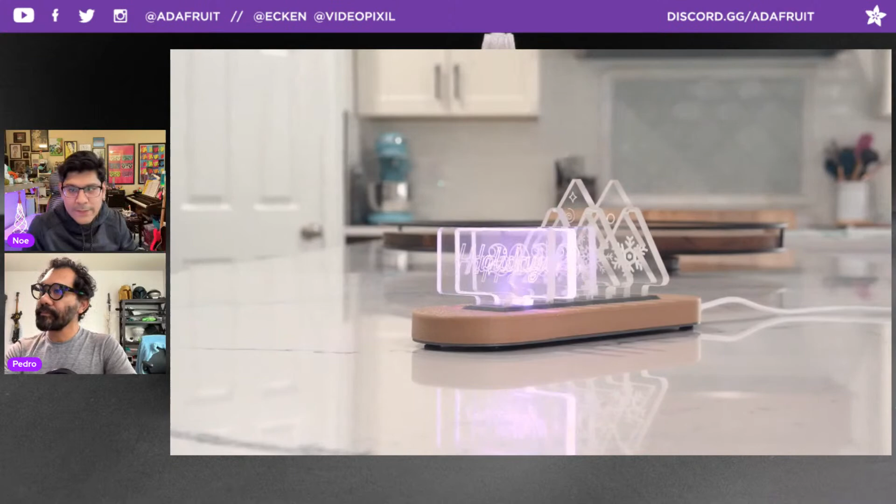So I've seen a couple of folks actually make this project with their own laser cutters and their own bandsaw cut, yeah their own design. So it's just a cool effect to create a cool stand for pieces of acrylic that you can edge cut.

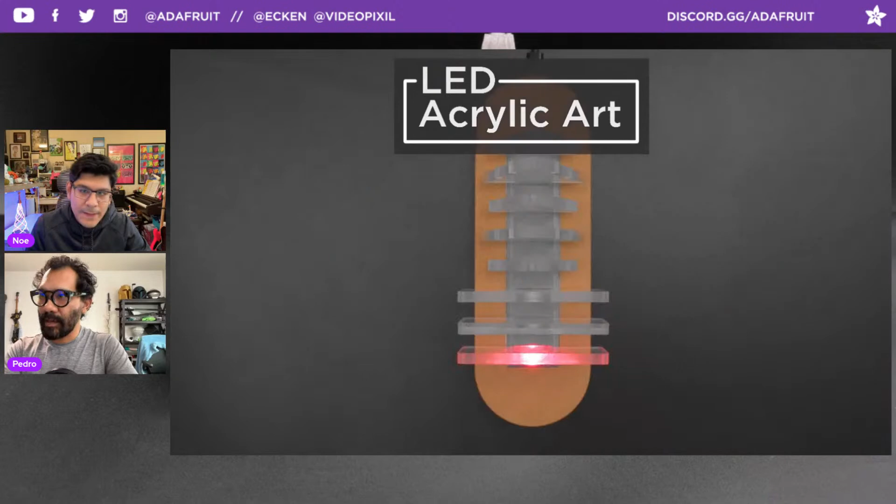Edge light. Python code to do each individual little light up. Yeah, oh this one's cool.

And you can see through them, actually, which is kind of cool. And it's code by Phil B.

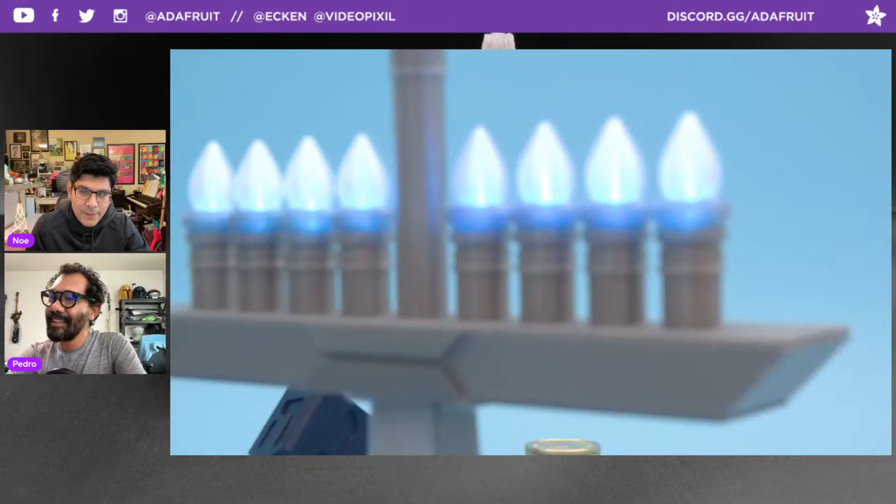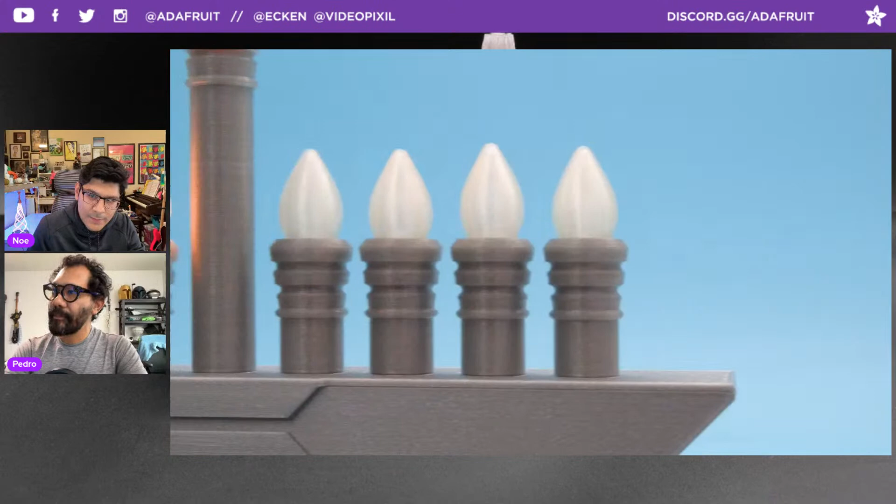Hanukkah, this is a menorah. It's got the 8, yes. Or 8, no, 9, no, 8 candles, and the middle one lights the candles. Press the button and it lights up the candle. So it uses NeoPixel buttons and this nice 3D printed menorah.

I think it's a QT Py. This one's been on Lamar's list for quite a while because she said a lot of the ones that are out there don't actually do this functionality, right. Right, they all just light up and they don't actually work like a real menorah is supposed to be lit on each night of Hanukkah.

Yeah, the correct order being that the first one is already lit. I'm guessing the other ones didn't do that. Right, yeah, the order goes from right to left, and then the middle one is what's used to light all the other ones. So functionally it's got some logic in there.

Yeah, it's all done in CircuitPython. It's a Liz Clark collab.

Yeah, it's pretty cool. Yeah, you can do so much stuff with the Crickit. You can have sound effects as well if you want to. Yeah, there's sound effects on here, so when it drops down it does a nice little laugh.

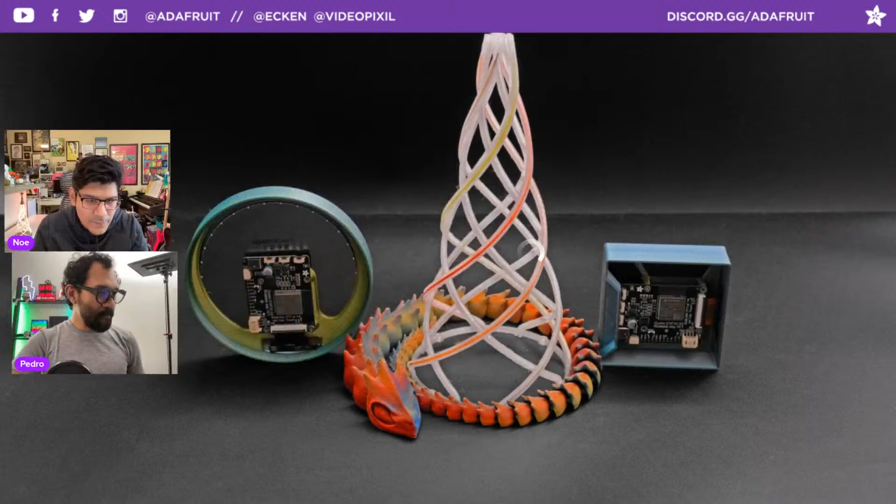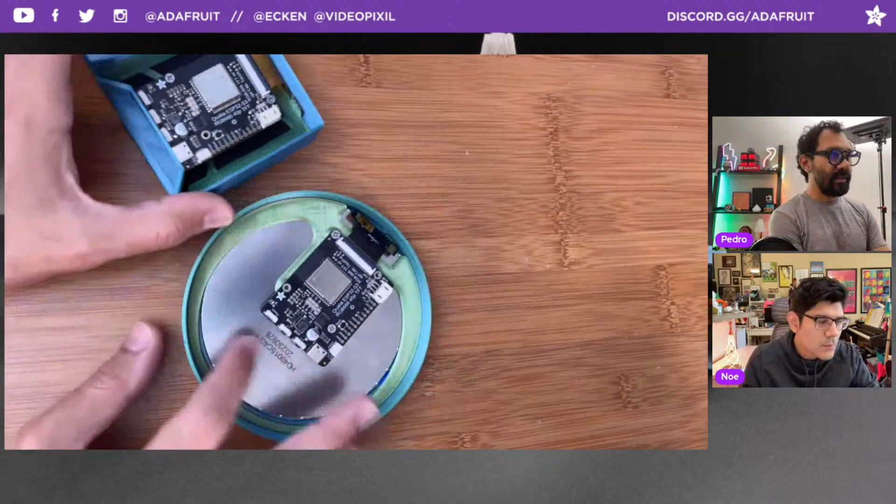All right, continuing on with what we're prototyping. We got the next prototype as well. We got a bunch of these screens in. Now the work begins with getting all the coding in and all of the cases to fit.

Right now I'm working on this 4-inch round display. Take a look at it, it's not really round, it's more like an ellipse or an oval. The screen where you actually see the content is a circle, but the plate that the display is on is not, so it's a little bit challenging.

You can see here the mount for the Qualia board, which we're using for all the displays now, powered by the Qualia. This one has the S3 on it, and you can see the mount for it. It's a little weird, you get these weird shapes. I'll show it in the sketch when we talk about the project when it's released.

And then there's the shape where the ribbon cable connects to the PCB. It's a good channel there, so we have a channel for that, and then there's just the weirdness in the way it's sort of like a squished ball from the sides.

Still trying to get that tightened up so it's not so tight that you're accidentally breaking your display by inserting it. So it's a little loose right now, just a tiny bit, as I close up the tolerances for that.

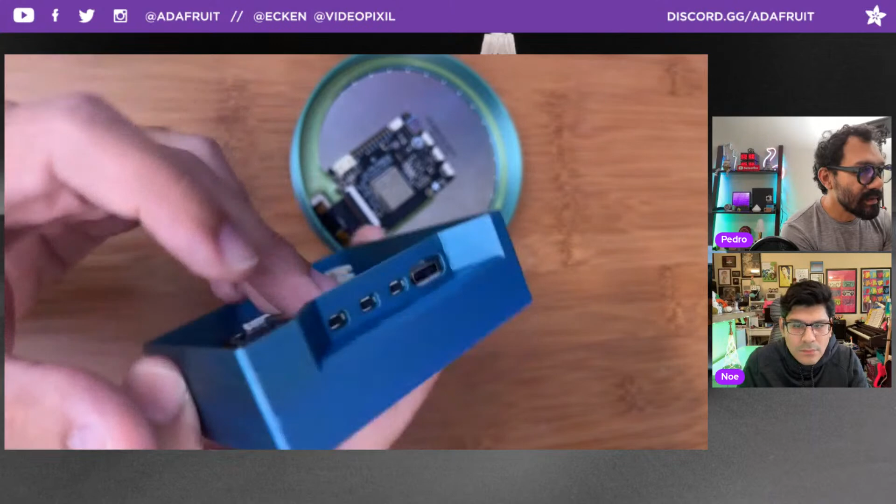I think I'm going to do the Ninja Flex buttons for this, so I don't have to keep messing with trying to make this thinner or having chamfers, because with how close they are to each other, it's just going to eliminate or not work at all. So I think I'll go with a strip of Ninja Flex, so each button can be pushed in that way. Maybe an overlay that goes over it, or inserted somehow. I'll figure it out, might have to push this back up or something.

For this guy, the way I'm going to cut in, I'm not too sure.

This would give you access to buttons, right? The A0 and 1, or is that for sensors? I think you could do a button, a button or two, so I'll probably wire that and it'll come out of the back or something. But I will try to go in there and do the same thing where I'm cutting in like that, so they can have access to it. I shall see. Yeah, it's okay if you don't.

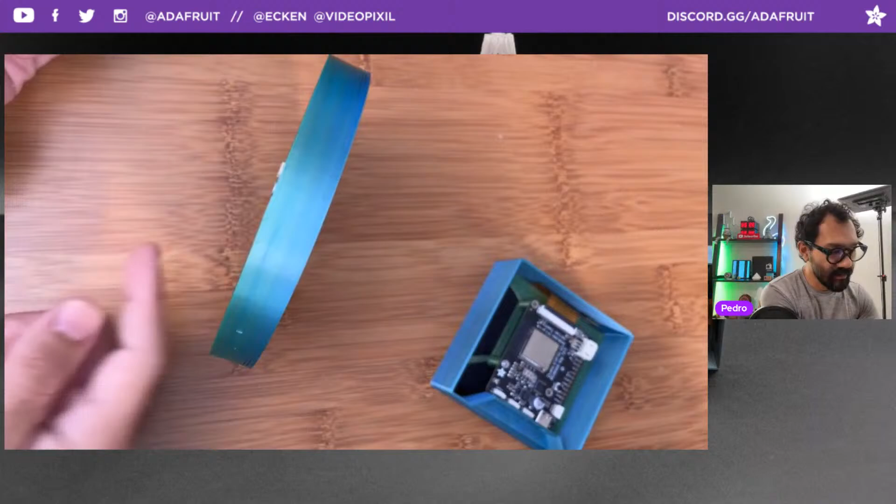I'm trying to think about the use case of what this is going to be for. So if you don't even need a button, but if you do need it, you do need USB - that's something I thought about. So having maybe the right angle adapters we have, so it's pointing up, you plug it in like an Apple mouse. Which actually would work, since I'm thinking it'll be on its side like that, so it'll point outwards with the cable. That should work.

So yeah, the only thing left is getting the lid designs on there and getting the code to work. There was a bug with Chrome in terms of flashing the bootloader on there, but that should get worked out soon. So that's what I'm working on now, just getting the lids and any other mounting geometries figured out.

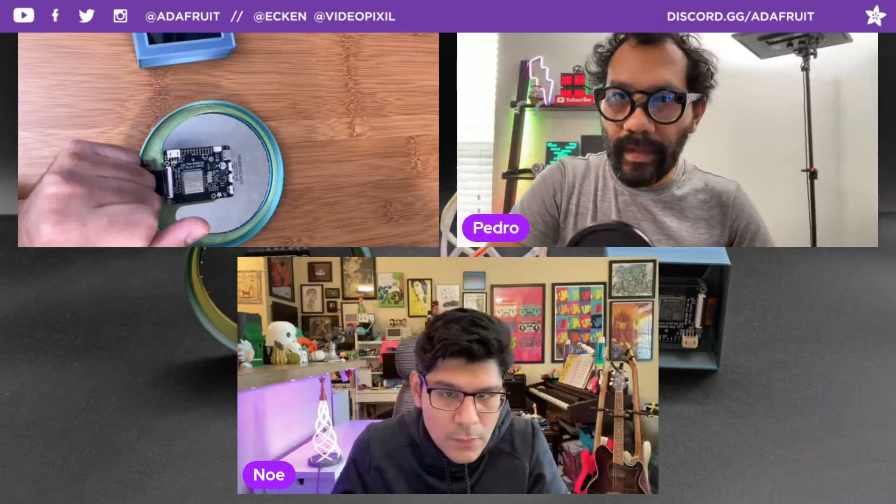I have a quick project, since our coupon code is Noodles. We have these small, shorter noodles, and I wanted to come up with a 3D printed ornament using them. So I came up with this thing - it's a little bell shape, and it has a custom case for holding a CR2032 coin cell battery, which is just enough voltage to power one of these little guys. And then I have a little slide switch so I can turn it on and off.

It's blinking, nice, there it is. I have to press these together. I have little bits of solid core wire that wrap around the inside of the case because there's a little channel for it. So that's kind of a neat way to create a really slim, low profile coin cell holder, because we have coin cell holders with built-in switches, but they're one color, fairly big, and not the right shape, I think, for a little elegant ornament like this.

So I posted on socials, and folks are submitting different ornament shape ideas. I think the winner is, of course, the Adafruit star - I'll have to use a bigger noodle, the longer one - and then of course the pickle, the Christmas pickle, so I'll have that in green. But I thought it was a cool idea to create a custom coin cell holder that complements the design of the ornament. So again, this is a bell shape if you haven't figured it out, and it has a little loop, but it's got that same method of creating a shape and then a channel for the LED noodle to press fit into.

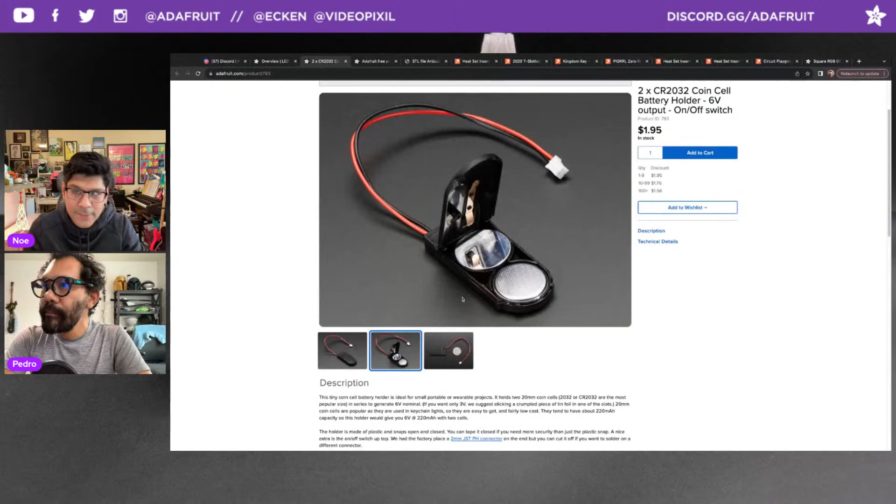So the LED noodle snowflake uses the two CR2032 coin cell holder. This is good for powering up to 4, because it's 6 volts, so you can definitely double up.

What did I use on mine? They're pretty bulky, I think, and like they come in... I guess you could spray paint it or something, but it looks like we have another one here. I used this translucent one too. Oh no, this is just one though.

Oh right, I actually have not seen this one before. Have you seen this one before, Pedro? Yeah, I got it, I grabbed like all of them. Really? The Ultra Hand.

I could probably recreate this design so it can be clear and just reuse the guts, the little spring contacts. That's kind of what I created - I made my own spring contact with, I think, solid core wire. The easier route is just to make a cover case like I did.

Here's a clear one that's nice - that's the one I used. But it's just only a single one. Yeah, I guess that's kind of nice. Well anyway, you can 3D print one and use solid core, so all sorts of options.

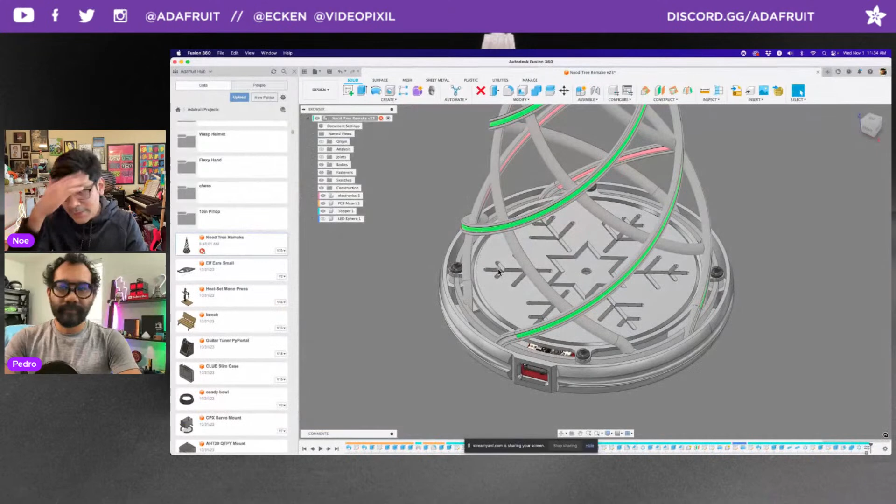I'll just show kind of like the finished version of it. So let me share my entire screen, go into tunnel view. Fusion 360 got an update, I think yesterday, where they have this new feature called fasteners - an integrated way to apply fasteners to your mechanical designs. One caveat though: you can only access the feature through designs created with the Teams hub, which is the new kind of data storage for your Fusion 360 models.

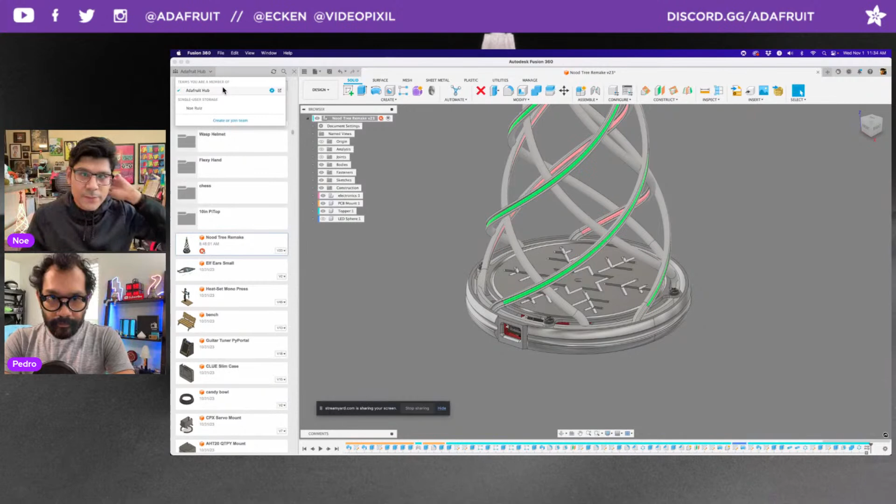They have a single user storage, and then they have a Teams hub, which allows you to share and collaborate on your design. That's just one thing I had to reach out to the support team for, because I wasn't able to get that feature. But it's super easy to create a team hub - you just click one migrate button and it transfers all your files over to a team hub, and then you have a lot easier sharing abilities with it.

So under the insert menu, they have this thing called insert fastener - this is what the UI looks like for it. It's basically a better way to create screws than having to use the McMaster plugin that's built into Fusion, which is what I use a lot of the time. But it's very involved - once you get your screw, you have to use the pattern tool to make multiple copies, and then you would use a joint to apply them to every individual hole.

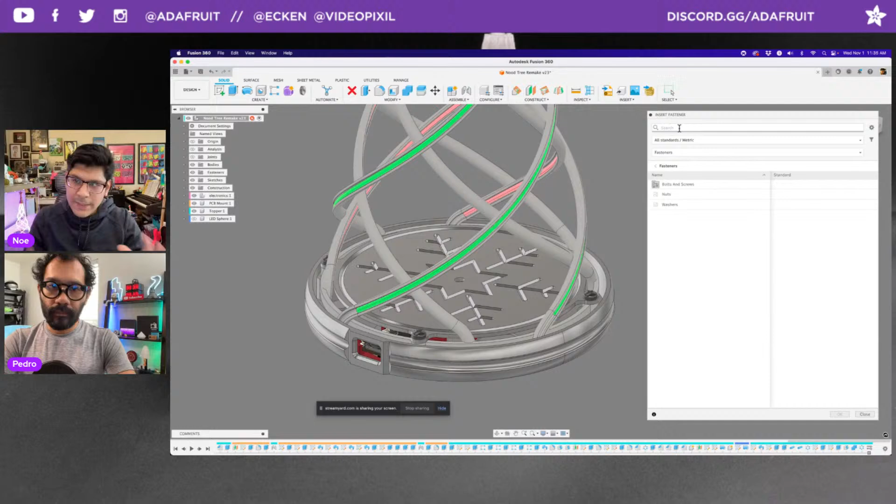This is a smart fastener feature where you add one screw and it looks at the body, and it'll add the rest. Let me see if I can do a quick demo. I'm going to add 4 screws to this PCB here. This is the LED driver that we're using in the tree.

I'll type in insert fastener. It has a built-in search, so I can say I want M2.5 screws. It will filter out all of the screws. So it's not just screws, it's washers, hex nuts, that sort of thing. And here are all the available screws. They have Phillips, countersunk, flathead, roundhead, hex bolts, all those fun things.

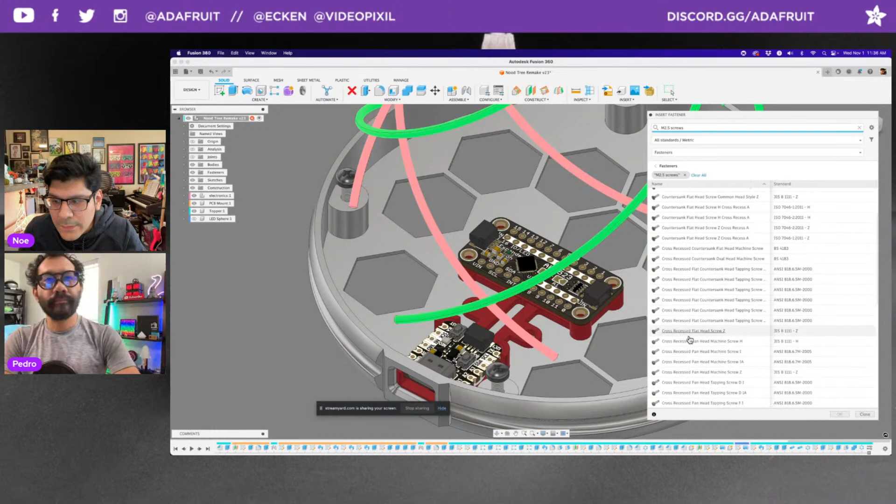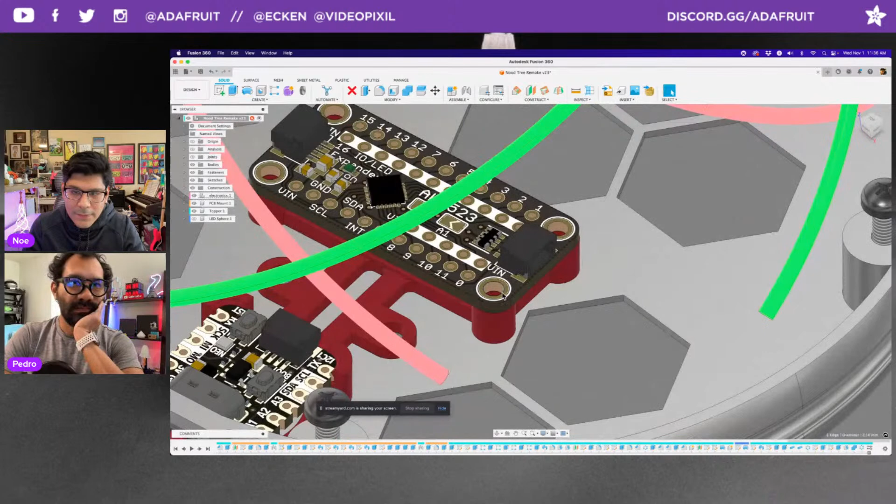Let me do a regular machine screw, maybe this one. It's not working. Does it need the hole selected first? Maybe. The idea is that you get this little ghosted preview, and you're supposed to be able to roll over the hole. I wish that option was right in that modal. Let me try selecting where I want it first. This is just new, so I imagine they're going to have some updates to it.

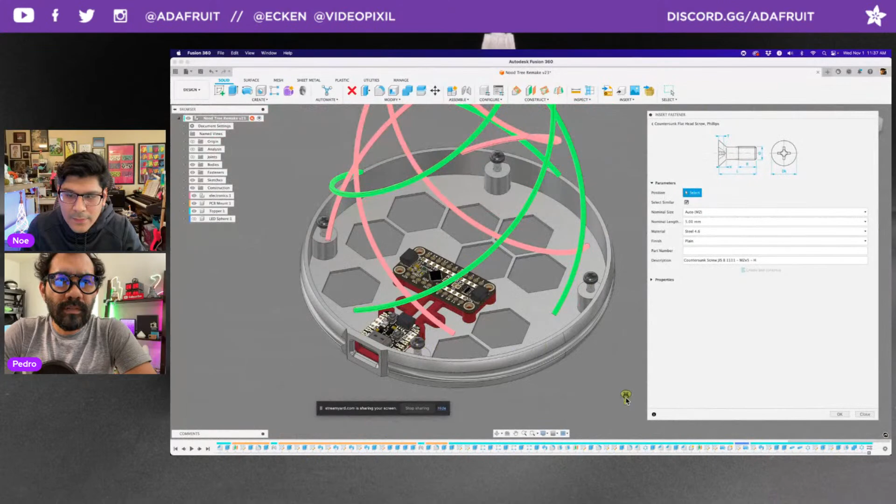Let me try the M2.5 screw again. We'll do the countersink flathead for now. Yeah, it doesn't seem to be working. Hold down shift while you're rolling over it. I'm holding down shift, nothing. Control? Yeah, it's still a little bit off. It could be because I'm sharing my screen, or maybe the floaty windows. No, it worked when we were rehearsing. I know.

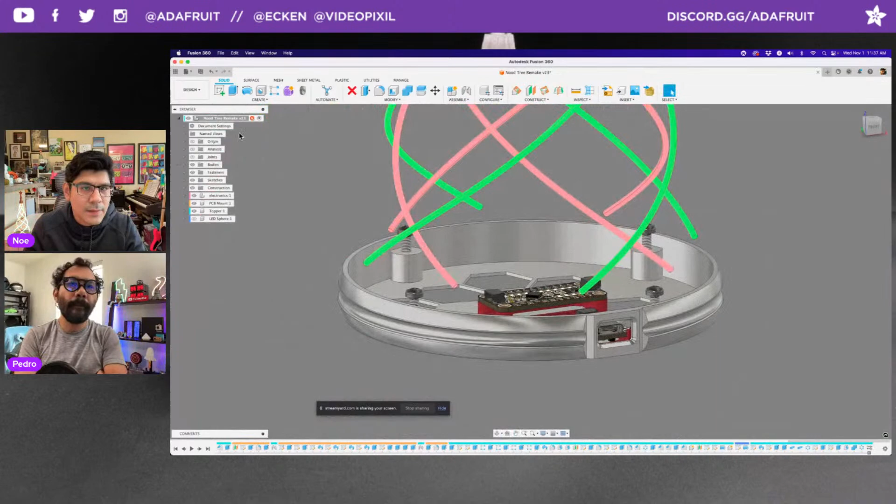Let me see. What did you select, the PCB or the solid? Well, let me just show. Where's my color? There it is.

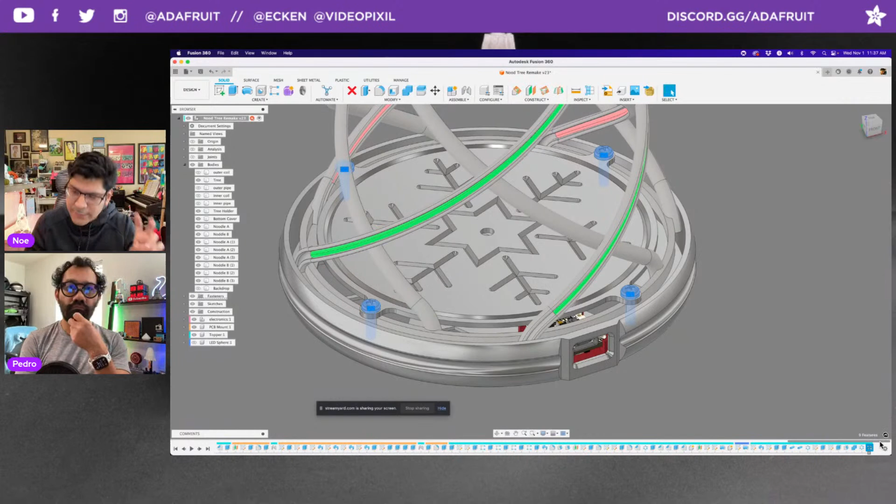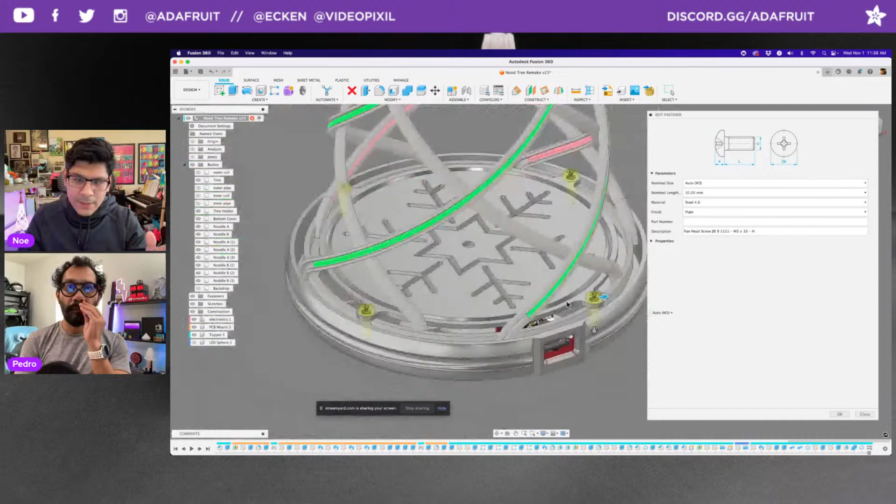Because when you did it over there, that's a solid. So in the timeline, you get your insert fastener feature. You can right click and say edit fastener, and here is where you can see what it is. If you're using the McMaster insert, once you set it, that's it, you can't change it. Here you can change it dynamically. It's very parametric in the sense that I added one thing and it knows it needs to add 4 of them. You can change the length if it's not long enough, or use these arrows to dynamically edit the size or length of your screw.

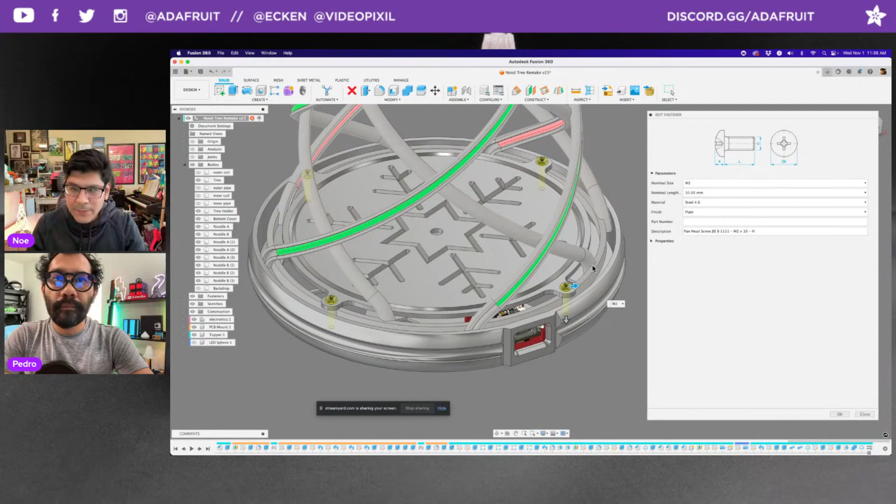It's just a lot faster. If you have a really heavy mechanical design that's super reliant on screws, a good example would be the synth guitar, it had a lot of screws. This helps you figure out how many screws, what sizes, and the type of screw, like flat head, button head, or socket head, so you can manage it much better. Your timeline is way cleaner because with that guitar example, my timeline was filled with all these screws and joints. This really bypasses all that and cleans it up, makes it more efficient. It's a lot faster, and it's parametric. That is super awesome.

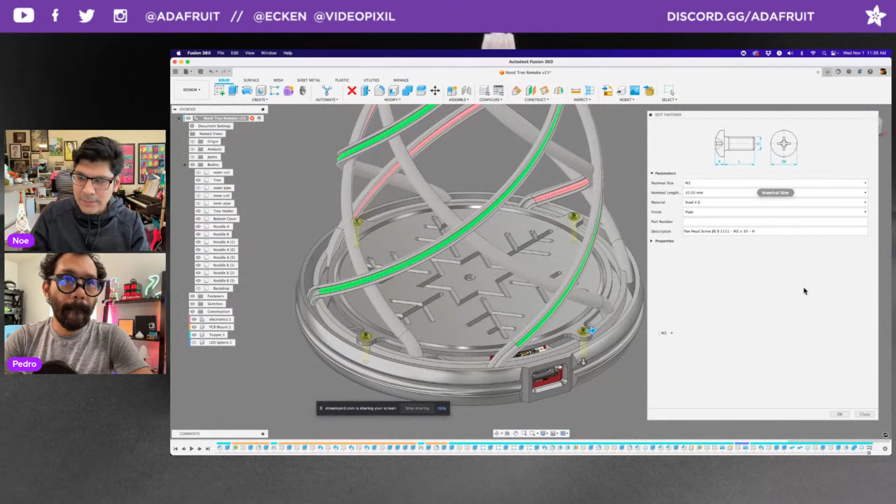When it works, of course live demos tend to be a little flaky. Yeah, with this one again, you selected the solid, not the PCB board, maybe that's the issue. The thing is it's supposed to work across anything, so you're not supposed to have to select anything first.

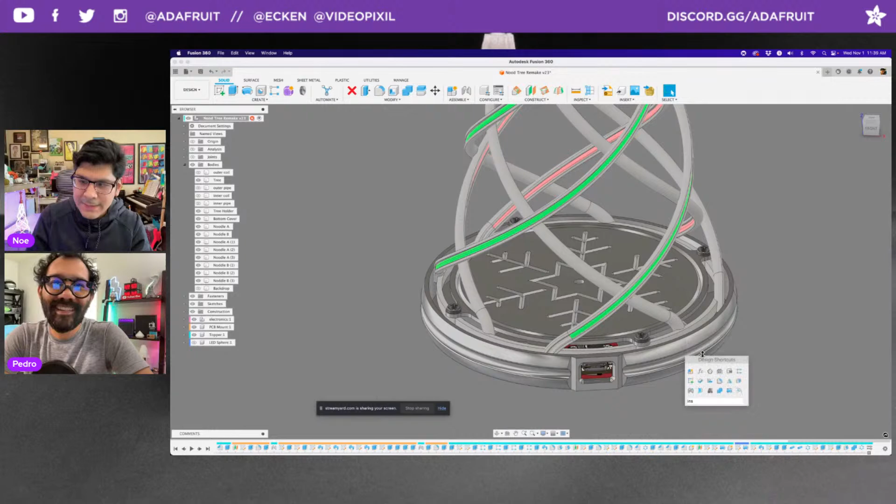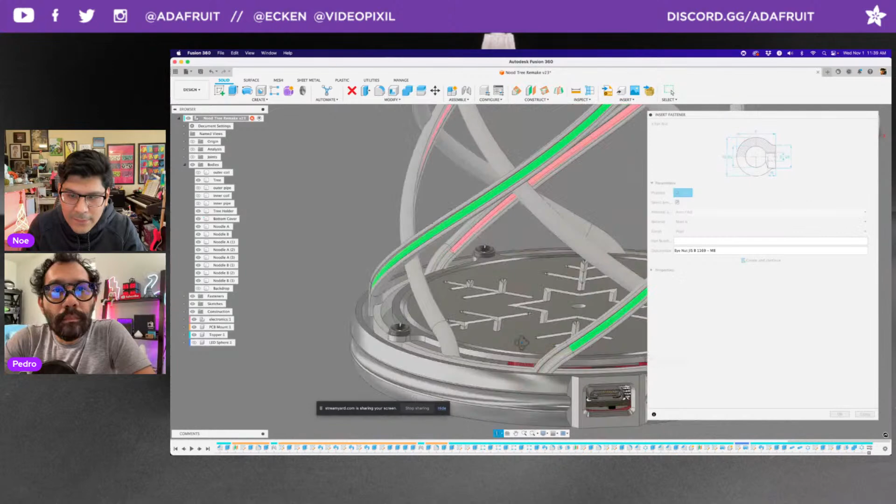Let's say I wanted to add some nuts, I guess M3 nut, let's see what happens. Oh cool, cap nuts and eye nuts. What's an eye nut? You can see here how now I can select things, now it's working. It's supposed to work with any kind of hole geometry. Click on that and it automatically sizes it. You see how it says auto M8, but that's because I selected this weird eye nut. Let me pick a regular hex nut here. There you go, you see how it automatically sizes it? I just rolled over it and it knows it's an M3.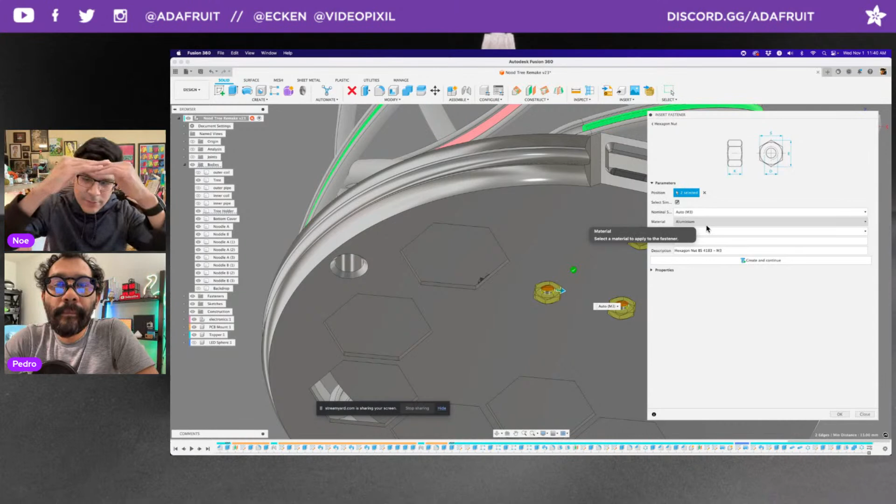You can change the material if you want. This is like if you wanted to create a BOM, a bill of materials, for a real product you're manufacturing, you'll be able to generate a list of exactly the screws and hardware that you need for your product.

And that just saves you a lot of time. And it's parametric, so nice. You click create and continue, and it gets added in your timeline. Then you can modify it if you ever need to.

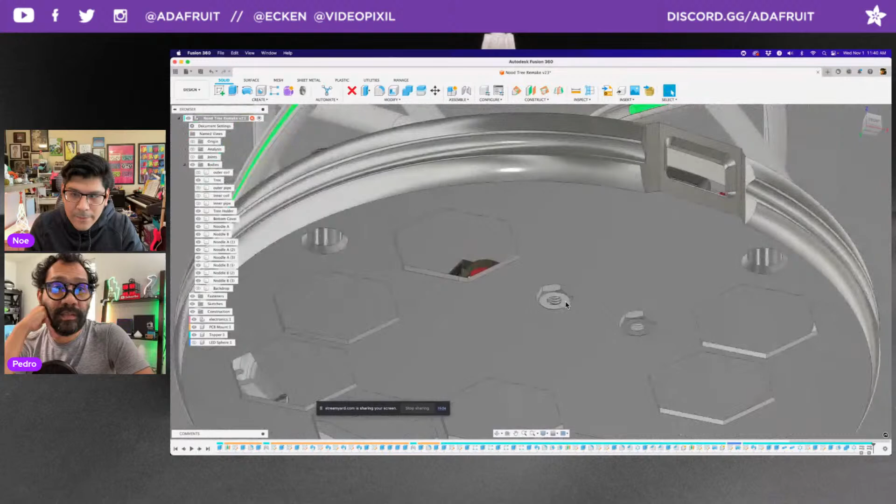Obviously, nuts wouldn't go there, but it's just for this demo. No, it could—you could project the hex off of that, into that, if you want to do a countersink. Yeah, and it's nice. It's neat. So there's a new folder called fasteners, and you can see that they're all added there. Very nice, that's nice.

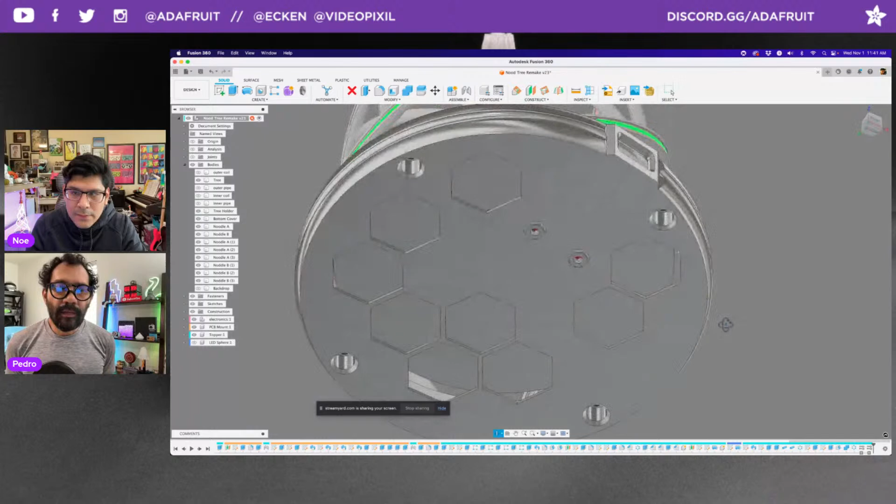So it's doing a lot of smarts behind the scenes. That's how I'm going to use it—to verify lengths, to project the cutouts for countersink screws. I just like that I don't have to create joints for every screw now, because that's how I was doing it before with the McMaster thing. So hopefully we get some updates. As you saw, it was a little buggy, but that's because it's version 0, right?

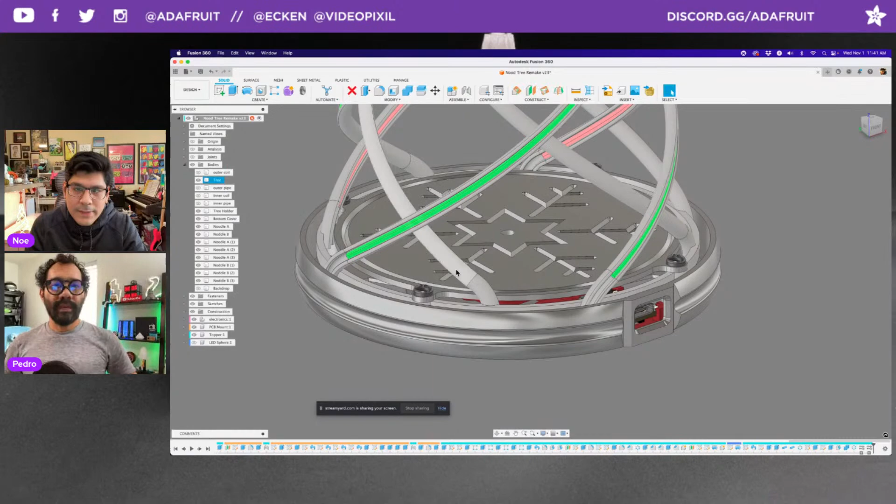Yeah, so that is my shop. We don't have a 40-core M3 Mac yet. Oh, right. Not yet.

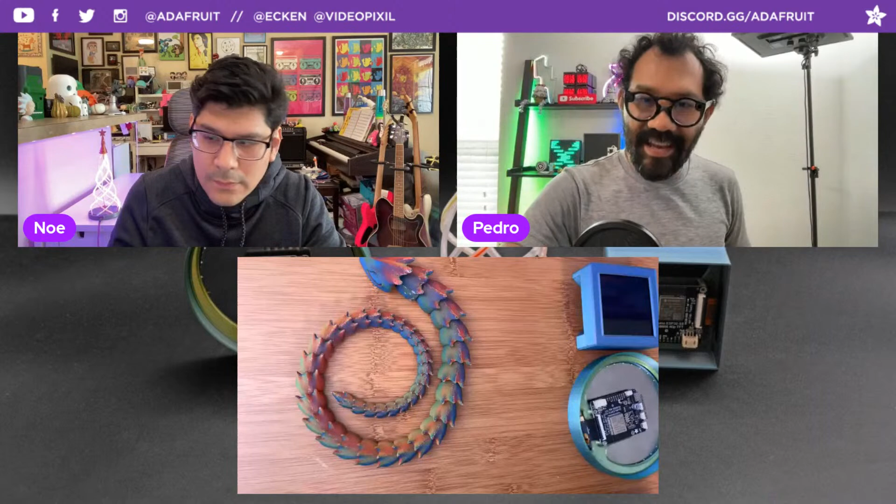Yay. Oh, real quick—someone in the Discord is saying, are you thinking of the Joule Thief? Yeah, that would be a good Joule Thief, huh? You remember that, Joule Thief? What is it—it's like it was just a little light to, you know, use up all the coin cell battery. I don't know that. Yeah, I remember the name, but I can't recall what it looked like, actually.

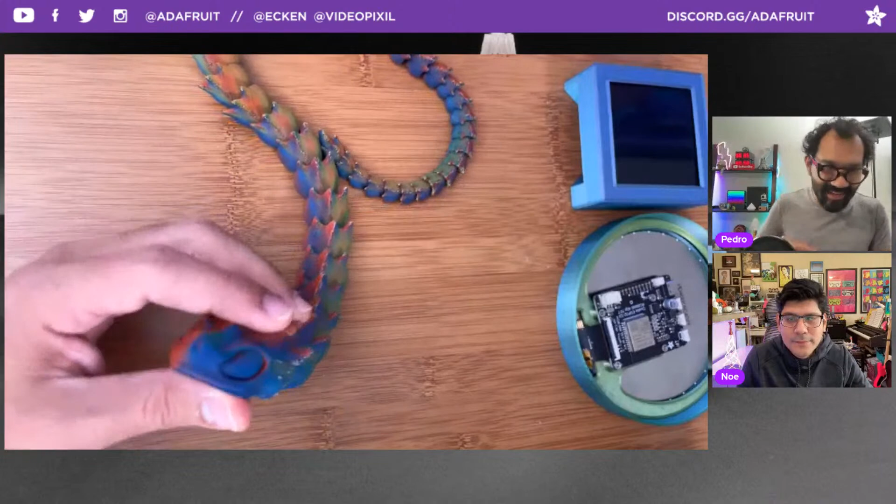All right, this week's Timelapse Tuesday Community Makes is this really cool snake dragon using that tricolor neon filament. It looks pretty cool, the way the color changes. Obviously, the only downside with the way it took the time lapse is just so much stringing on it.

Yeah, I tried another one with different settings and it came out, I think, worse. Oh my gosh, really? Yeah, it's all over—you can see where I had to do so much cleanup on it. But the colors look pretty cool. Even without a time lapse, it's still stringy. I didn't do it without a time lapse. Oh, so I was like maybe I could save it. Yeah, I see, so I just ran out of time. Okay, well it's a cool articulated dragon snake.

Let me share my screen too. This is a Cults3D design by designer Bold on Cults3D. Let me do this—there we go. Oh yeah, I forgot I could do that. Oh man, I should have done that with the thumbnail.

Oh yeah, you can have it stand up in this cool manner, and I guess it can wrap around your arm—these are really fantastic photos. This looks like it was printed in some of that silky filament. It's very shiny. It is a paid design.

I think it's about $3, maybe $2—it's in euros, and I could be wrong with the conversion. Let me go to... well, obviously this looks cool from the side. There it is, USD, yeah—so I'm changing it to US dollars. Wait, where? Up here at the top, there's a USD option. Okay, you can do ruble, you can do all the currencies. So it's $2.51 USD, or as you saw in pounds or euros it was $2.71, I think.

So it's a paid design, but it's because it's really nice. Again, the designer is Bold on Cults3D. It's a no-support, all-in-one print, right? No supports required. What I like is that it kind of looks like—what are those things called for the tree? Garland.

Yeah, for your Halloween tree, put it on grandma's tree. Wow, there's a snake in the house, or grandma. I think that's the tradition.

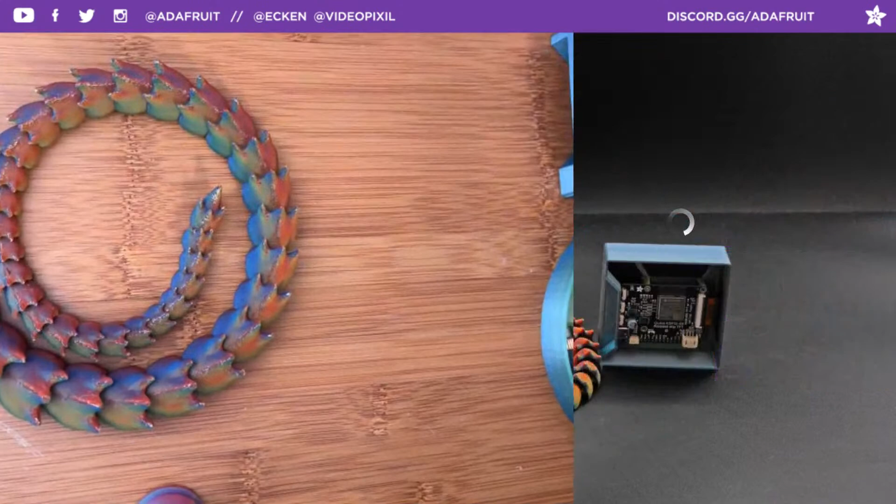Here's the Amazon link, and there are the 3, I guess there's 4. There's a matte colorful mist as well, which is like a nice pastel tricolor. But yeah, the idea is that you have 3 colors. The gray one's kind of neat, 3 shades of gray. It's PLA. I want to try the gray.

Yeah, maybe it gives it like... Yeah, this is great because if you're doing something that looks singular, this gives you a lot of shade of color. It's perfect for simple designs.

Vince said it'd be great for the circular case. Yeah, because at different angles the color changes, so it's pretty cool. And Zyro is the manufacturer, so good stuff.

All right, that is this week's Timelapse Tuesday - long-winded. Are we ready for community makes? Yeah, all right, starting off with...

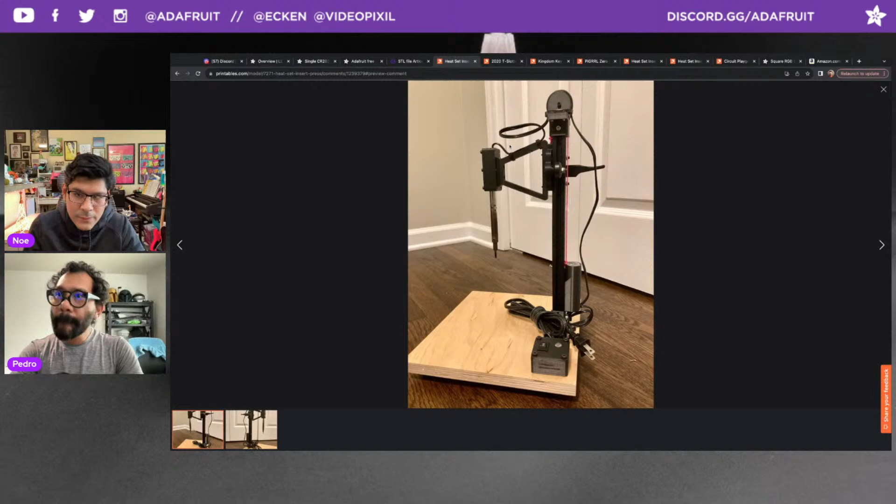Soul Enterprises posted a make of the heat set insert press. They said it was a fun little afternoon project, enjoyed printing and putting the insert press together. Experienced some wobble, but with proper torque, most of the play was taken out. They printed their own controller board for their Radio Shack soldering iron, but it's a very open design, so folks can create their own controller boards, bases, all sorts of things. Lots of mods already for it, so it looks really nice, and they're using a piece of wood for the base there, which is a good choice.

After that we have a make from Autobot. They printed up this 2020 T-slotted extrusion wall mount. So if you want to mount a piece of 2020 to a wall, this is just a little bracket, and they got theirs printed. You can see the wall has a bunch of aluminum extrusion for various things that you want to mount on the wall. They say, so far so good, let's see what happens when parts start moving. Yeah, the idea is that it has a T-slotted profile, so the aluminum extrusion can slide along the mount, and it has 2 tabs for screws.

Very practical. I think you used this for the hat, right? Yes, I hung hats off of it. You can hang any other sort of thing though.

After that, we have a make from 3D Dave, or 3Dave, on Printables. It's a make of the Kingdom Hearts Keyblade. No comment, but a really nice photo. So you can print your own Keyblade from Kingdom Hearts. All support-free parts, and there's mods for it too if you want to print on a smaller bed, on a 3D printer that has a smaller bed.

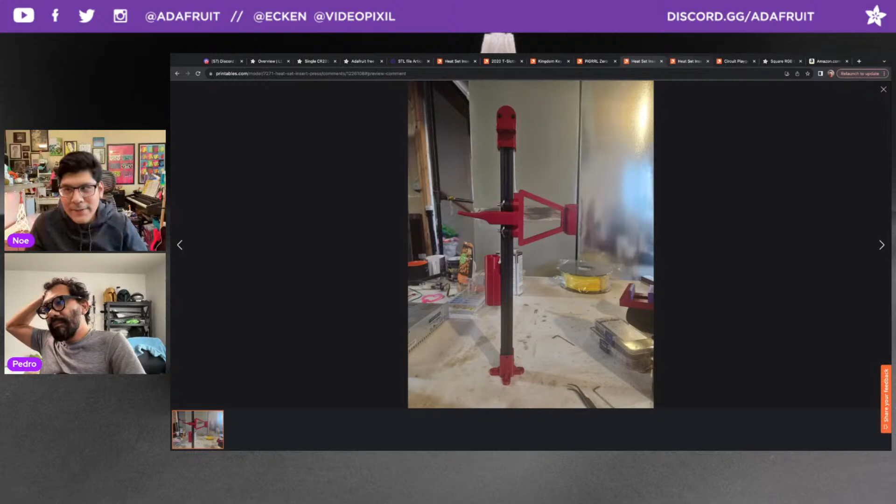And we're not done, another make of the heat set insert press, this one's from Tayden 85. They say it's easy to print, and the base was made by me in Fusion 360. They have this really nice hexagonal chamfered base that looks really cool. Looks like they used a different aluminum extrusion, this looks like a 2040, where you put two of them together so you have this really rigid extrusion. But yeah, the base looks really cool. I wonder if their bed has that texture, and that's why it came out like that. Also looks shiny, very shiny. Very cool.

I think the last one to round it off is a Circuit Playground Express snap fit mount posted up by Creatrix Brit. It says, excuse the mess around, this is my make of the star model. The board fit perfectly and made all the difference in my droid build. Nice, cool.

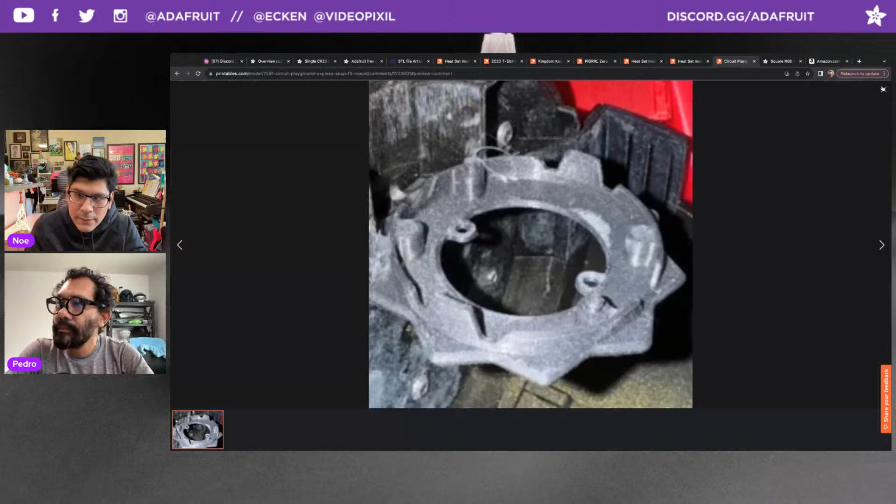This comes in different shapes, but it's just a nice, easy no screw snap fit solution for a Circuit Playground Express. It has these little tabs to hold the PCB down, and then two extra mounting tabs so you can secure that to another surface. Don't forget space for a battery. Oh, that's right, space for a little battery if you want a nice all-in-one solution.

So cool, perfectly encompasses what our duties here are at Adafruit. Yeah, you build these things, you never know where it's going to go, and a droid is like a good example of this. Take all these components, add more value to your boards.